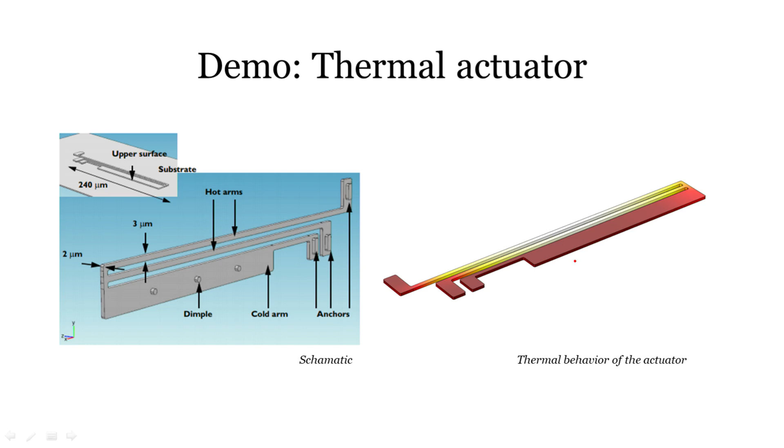within tens of micrometers. So let us see how to actually model this kind of multi-physics coupling, because there are 3 physics that are going to get into the picture. The first physics is the input current that we give. Because of the input current or voltage, there would be a certain rise in temperature because of Joule losses, and because of the Joule losses there is going to be some kind of thermal expansion, because each material has its own thermal expansion coefficient.

This is what we are going to couple. We are going to couple the electrical physics with the thermal physics and the structural physics, which leads to deformation. Our end goal is to see if we change the voltage, how much is the maximum displacement the thermal actuator gives. So let us go and try to understand the physics step by step.

The first physics is the electrical physics. So in the circuit that you can see over here, we actually are going to apply a particular voltage at one of the edges over here, that is one of the anchors, and we are going to put the ground somewhere over here. The voltage that we give could actually be coming through a very big circuit.

If you are a little bit experienced, you can go ahead and make a blank model, so you don't need to add any physics. Just one click will lead you to a completely new, blank model.

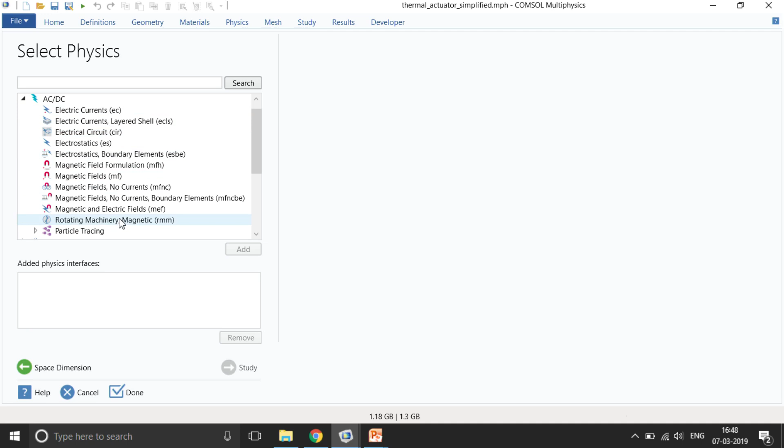So our first step is to do only the electrical physics. Let us go into the AC/DC module. This is the AC/DC part, and in this part there are a lot of different interfaces: electrical current interface, magnetic field interface, rotating machinery magnetic interface where you can model motors. As of now, we will go ahead with only the electrical currents.

This specific interface is to model currents through conductors. If you are talking about capacitors, then you need electrostatics. So let us go with electric currents and add.

So I can go to the next part, which is the study. Here there are many different kinds of studies we can perform. We can do frequency domain study, which allows us to do harmonic input. We have stationary study, where we can give a steady state analysis, that is we give only a particular voltage. Then we have time dependent study, which helps give transient analysis of your complete system. So all these three different kinds of study can be performed.

Along with this, we have small signal analysis, wherein we give a particular DC bias along with the AC component. So let us go with a stationary analysis and click on done.

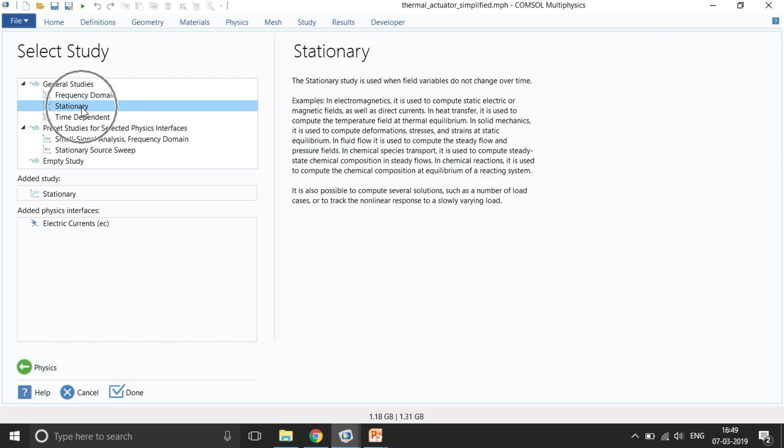The approach that you can follow in COMSOL is the top to bottom approach. That is, you first create the geometry, add the material, add the physics, then perform the meshing, then you do which kind of analysis you want to perform, and finally the results. So this is a top to bottom approach that usually is preferred in COMSOL.

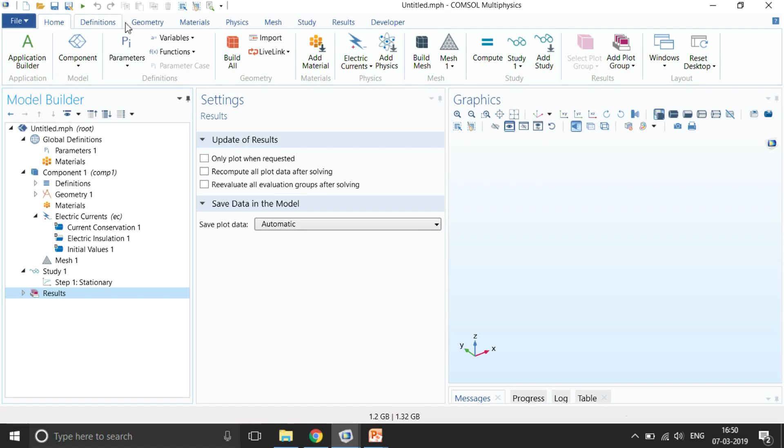One more approach which is preferred is in the ribbon pane that you can see in the top. Here you can see the same thing that you have already seen in the model builder. You have to first create the geometry, add the materials, apply the physics, perform the meshing, analyze the which kind of analysis you want to perform, then finally the results, that is to analyze your results. We also have one more block as developer, that is if you want to write your own code along with the code that is being solved by COMSOL.

So the first thing is to make the geometry. However, to save time, I am going to import the geometry. There are two ways to import the geometry. One is to import through some other CAD tool, and if you want to insert a sequence, it's like a step by step process to make the geometry.

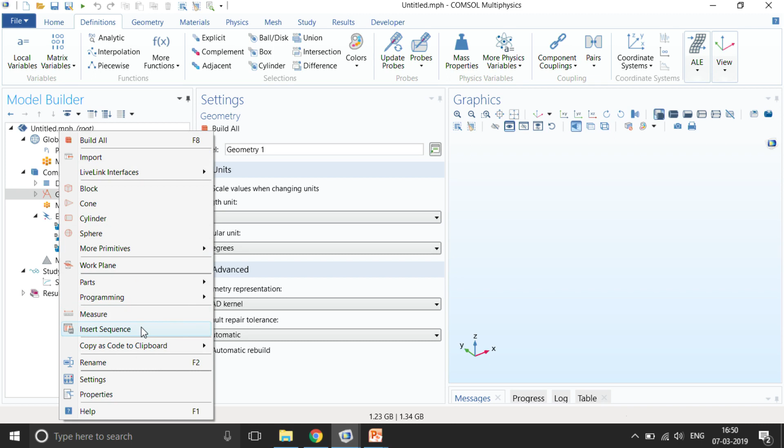If you want to insert that sequence from a pre-built COMSOL file, you can use insert sequence. So let me choose insert sequence, and I choose the model that I have already created, and I click on zoom extents. So this is the geometry that's already available in the library file.

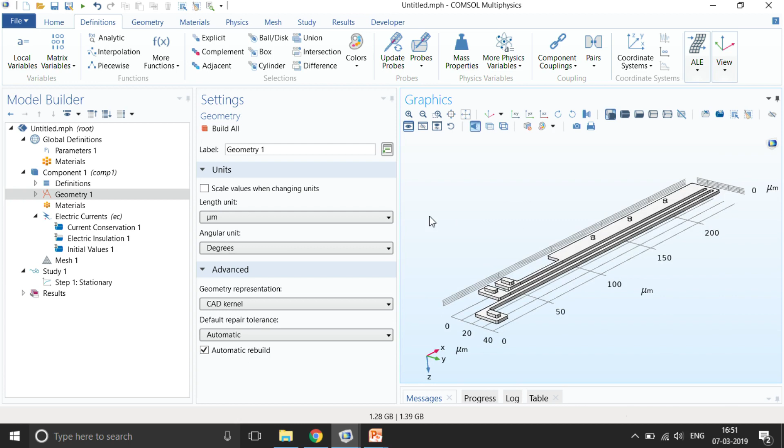So if you want to go through this example model, which is also known as thermal actuator, you can go to file, application library, and just search for thermal actuator, and you will see the thermal actuator model file available over here. So I have added the geometric sequence, as you can see over here.

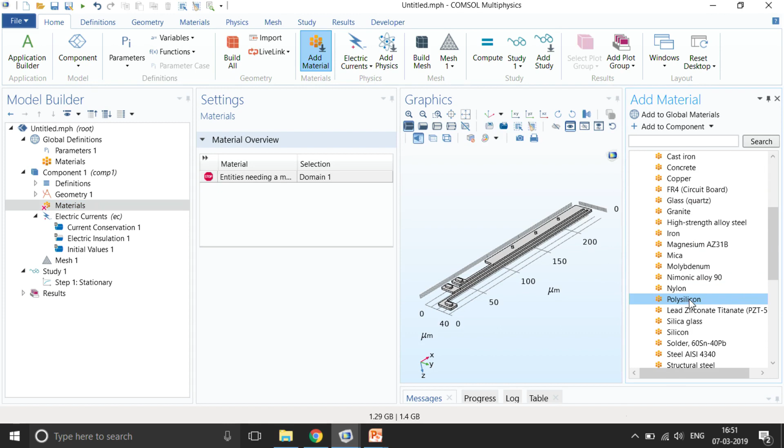The next thing is to add the materials. So let me just add the material by right clicking the material, add material from library. I can go ahead in the built-in, I can have the polysilicon material property. Now we can see that over here the material property includes electric conductivity, which is being defined as sigma as a function of T.

This T is the temperature. What it means is that sigma is not constant, it is a function of temperature. If you want to see what is the relationship, you can open this polysilicon and then go into the analytical function which defines the conductivity, and if you plot, you can see how the conductivity is decreasing with the increase in temperature.

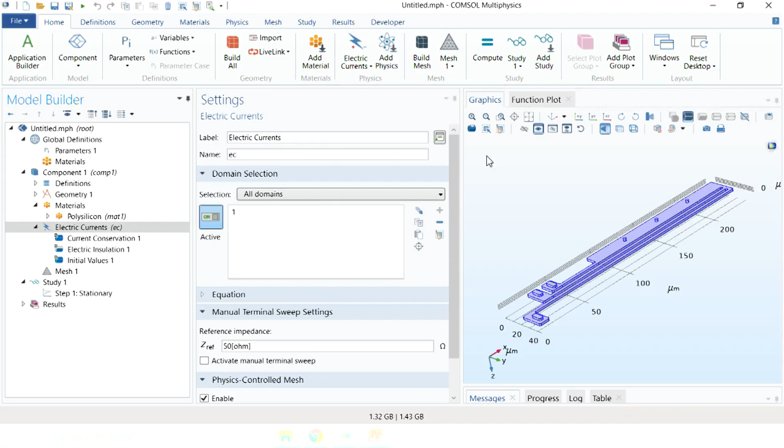The next thing is to give the physics boundary condition. As you can see over here, we apply a particular voltage at this anchor and ground at this particular boundary. There are different ways of applying the boundary. For example, you can use electric potential. Another way is to use terminal if you want to evaluate the resistance offered by your system.

For example, I want to know the resistance offered by a system. So I will go ahead with the terminal and apply that particular boundary over here, and I give the terminal type as voltage, and I choose the voltage as V naught.

Right now you can see that it is showing unknown variable, because we have given a variable name, but you have not defined it in the parameters. So let me go to the parameters. All these parameters have already been assigned, because we have imported a sequence of geometry steps, so these parameters are defining the geometry steps. Let me now define V naught, which is around 5 volts, that is the operating voltage.

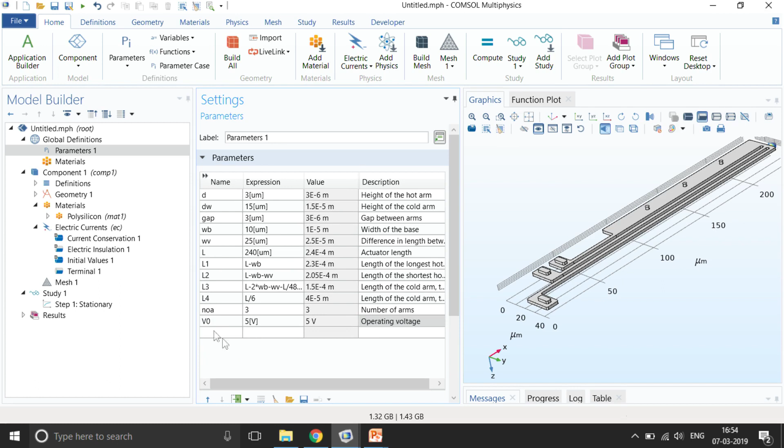So now the error has ceased to exist. There is no error. We have given a voltage over here. So let me also give a ground boundary condition on this particular part over here.

Okay. Let me go to the mesh and click on build all mesh. So, this mesh that you can see over here is fine enough. If you want to improve the mesh, you can directly go to fine or finer. I think fine should be good enough.

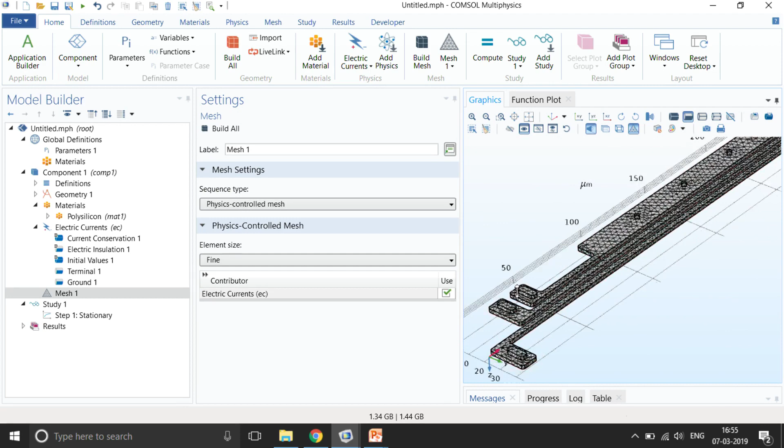No, now you can see that actually the dimple was cylindrical, but over here it is not even a cylinder, right. So, this mesh might not be sufficient enough, because your geometry might have the cylinder, but the physics is going to be solved the way the mesh behaves or looks like. So, we need to go ahead and also increase the meshing.

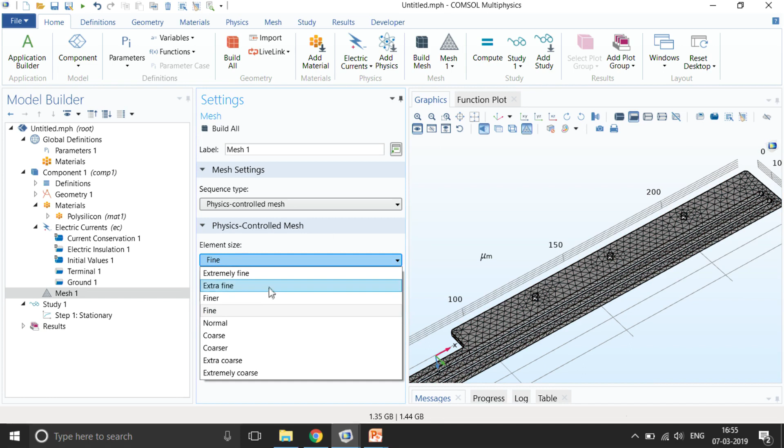Let me go to finer, and now you can see that the mesh has nicely resolved the cylinder, right. So, now this is what looks good to proceed further. So, let me go to my study 1. Let me write electrical study. So, my study 1 is electrical study, where I am only performing the electrical analysis. Let me go to compute and click on compute.

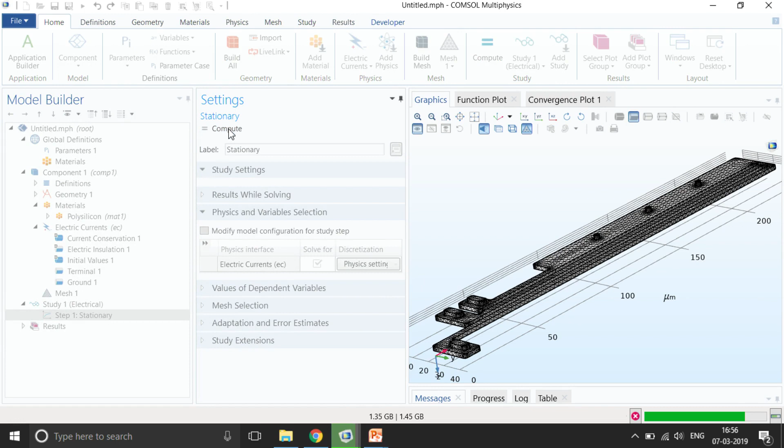So, now you can see the voltage distribution or the potential distribution along the polysilicon. Now, if you want to see the current distribution, the current profile, there are many ways to see. The first way is to know how the current is flowing through. One way to do that would be right click on the results, 3D plot group. In the 3D plot group, I can create an arrow volume. In the arrow volume, in the replace expression, I can search for the current density and click on plot.

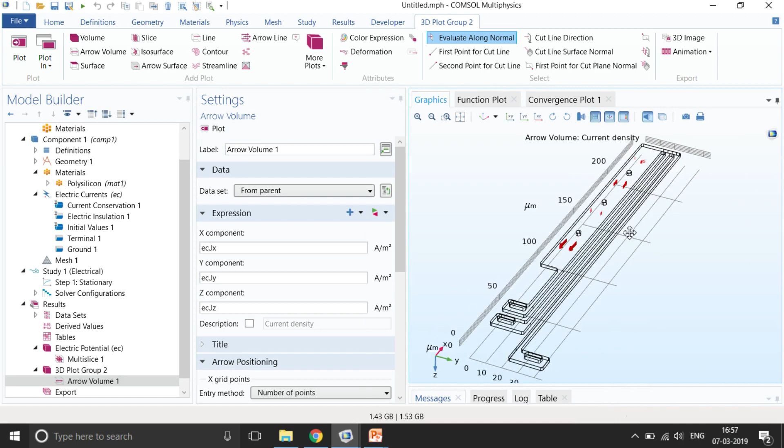Still now I am not able to visualize the current properly. Ideally, the voltage shows that it is very high over here and it is decreasing like this, right. So, our current profile should also be similar to the gradient of your potential. The better way to recognize it would be to change the grid points. So, let me just go ahead and change the grid points. Hopefully, we will be able to see those. So, in x and y, I need to increase the grid points, and in the z point, let me use only 1.

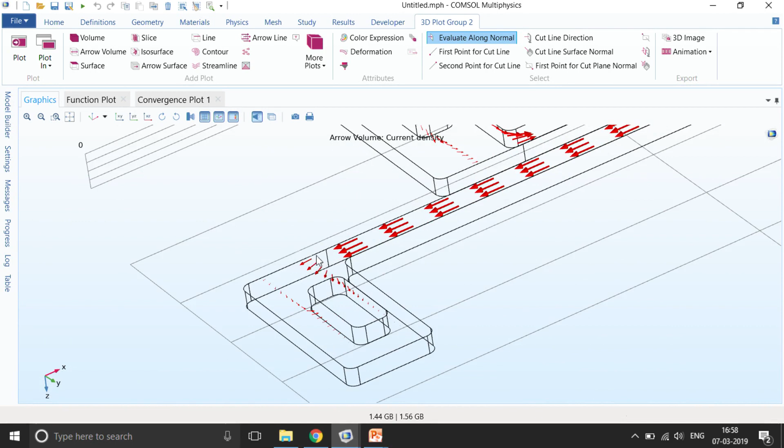And now you indeed are able to see the current flow. So, now you can see that the potential which was applied very high over here is actually making sense, because the current is actually flowing like this, and it is going to turn over here, and then it is going to move back towards the minus x direction to the ground where you have given. So, this actually makes sense, the results make sense.

So, it is always good that once you actually get the results, you also validate the current profile, how much voltage are you getting, to revalidate that whatever input you are giving is actually being conceived by your system.

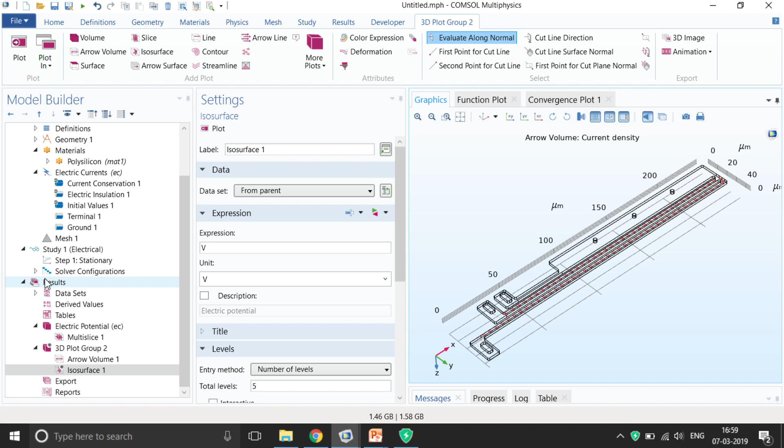Okay, so the next thing is to understand there is a current flow, and we need to understand where the current flow is going to be very high. To understand that, I will create one 3D plot group, and I can create one multi-slice plot. Multi-slice plot would be somewhere in the more plots over here, and I can search for norm of current density. So I can just search for current density, and over here,

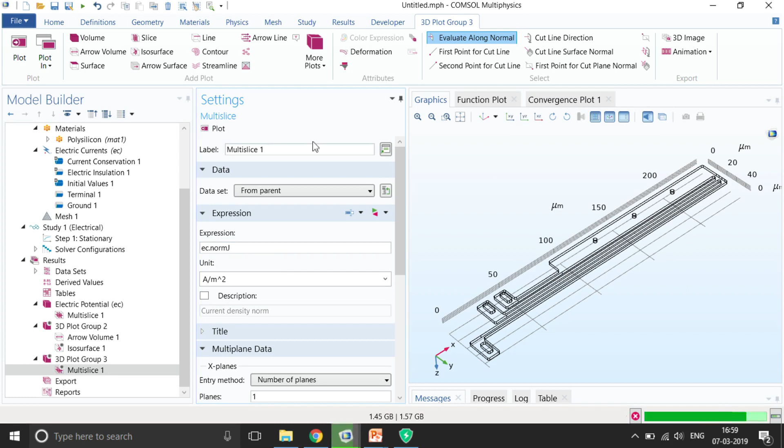and now you can see that the current density is very high somewhere over here, that is in the thin leg over here and over here. This means that the current density at these particular legs is very high as compared to the other domains. So that also means that the losses, which are proportional to the current, are also going to be higher at these particular legs.

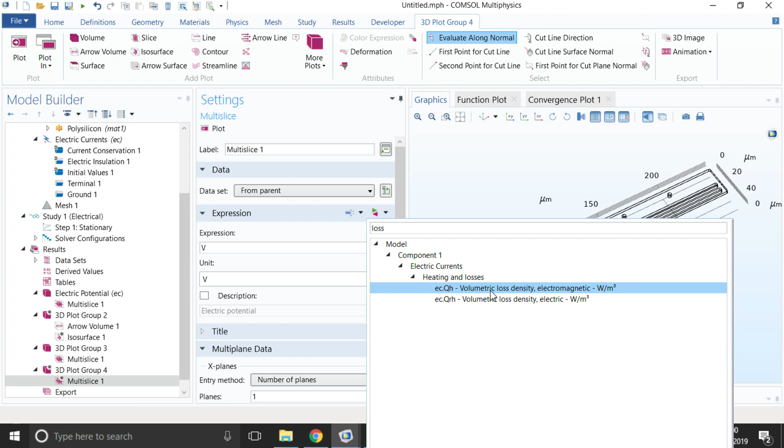So let us also see now if there are losses because of the Joule losses, how I can evaluate this. One way to see it would be again the multi-slice plot. So I can create a 3D plot group by right clicking on the results, and I can create one more multi-slice plot, and I search for losses. I have volumetric loss density, that is complete electromagnetic, and then only the electric part. There is no magnetic component, so we can choose any one of them.

Let me choose QH and click on plot, and indeed that's what it is showing me. The losses are very high at both of the legs. You can see over here, thin legs. It is even high at the corners, and that's the same thing the current density was showing, that wherever the current density is high, at the same place the losses are going to be very high. So these losses are, as you can see, in order of watt per meter cube.

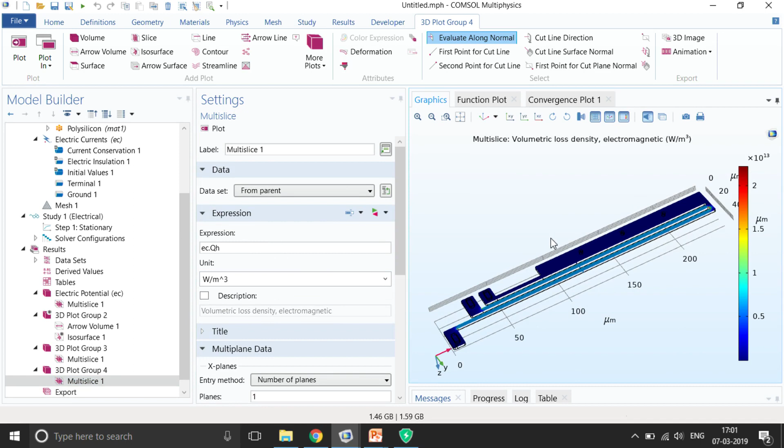Now you still have the losses, but you don't know what change in temperature the losses are going to lead to. You don't know which ambient temperature this system is working with, because we have not assigned it yet. So let us also set up a thermal condition to see how the temperature rises if we give a voltage of 5 volts at room temperature.

Before that, because we have many studies that we are going to have, to reduce the complexity, I will group my results. So I select all of them, right click on the selected nodes, and click on group. So my group 1 is electrical analysis.

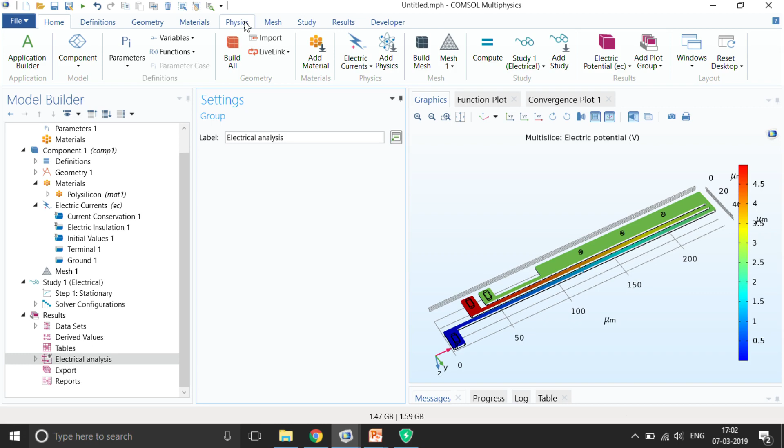The next part is I am going to add the thermal physics. So I go to physics, add physics, and I add heat transfer in solids. Now you can see that once I go back to my polysilicon, earlier only the electric conductivity and the permittivity had a green tick mark, but now as we have added the thermal physics, the heat capacity at constant pressure, the density as well as the thermal conductivity have been activated. Again you can see that the thermal conductivity is a function of temperature.

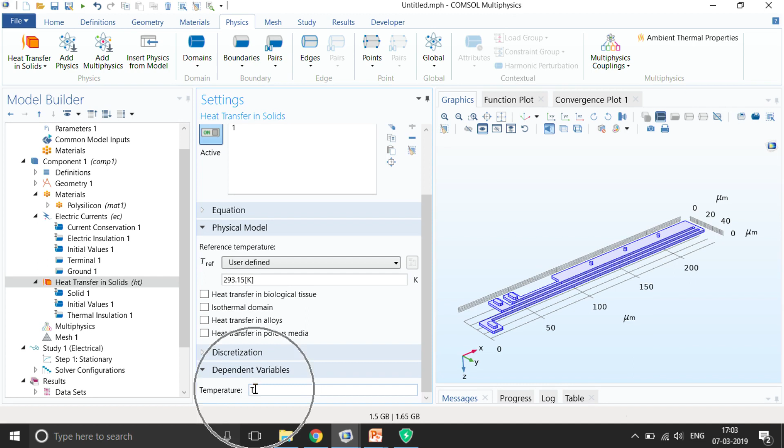The capital T is actually coming from here once we do the coupling. Even for the electric conductivity as a function of T, the capital T would be coming from the heat transfer in solids.

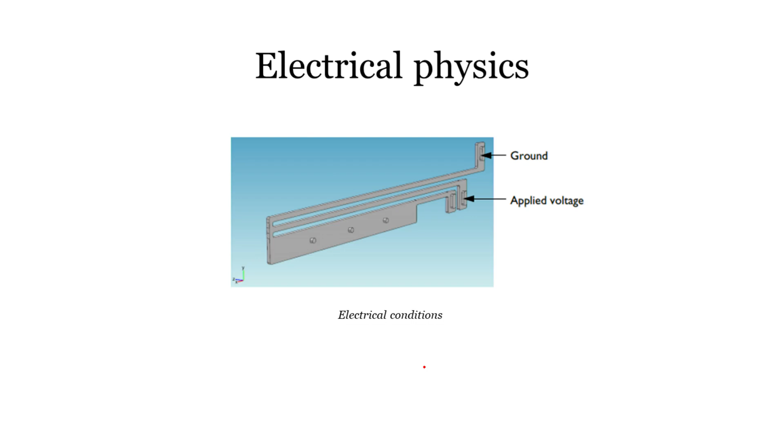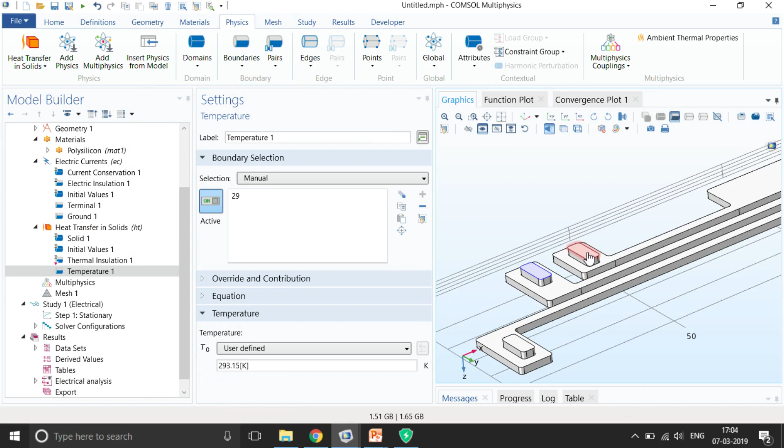So let me go to physics and add the fixed temperature. To add it, I right click on heat transfer in solids, go to temperature, and click on these boundaries, and by default this is the room temperature. As well as the top of the dimple, I click those. So these boundaries are going to be tied to a particular temperature, and it cannot increase from that.

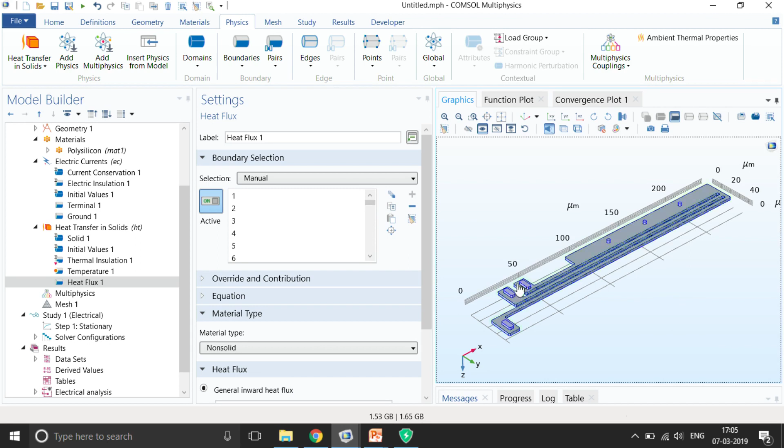Now we are also going to add the convective heat flux. To do that, just right click on heat transfer in solids, and use the heat flux boundary condition. I left click on my graphics and use Control A. That selects all the boundaries, and now I need to deselect the boundaries of the anchors and the dimples.

Next, are we giving an inward heat flux? No. Are we giving convective heat flux? Yes. So I enable this, and I also need to give an external temperature, which is room temperature by default. That looks fine, and the heat transfer coefficient as 5, which means there is not even airflow actually, just air surrounding this particular system.

If there is airflow, the heat transfer coefficient would increase. If there is water cooling the system, it will increase even more. So this heat transfer coefficient depends on the ambient temperature and the cooling condition that you are trying to give. For example, you can also choose external natural convection, internal natural convection, external forced convection, and internal forced convection. These are all the options that are available.

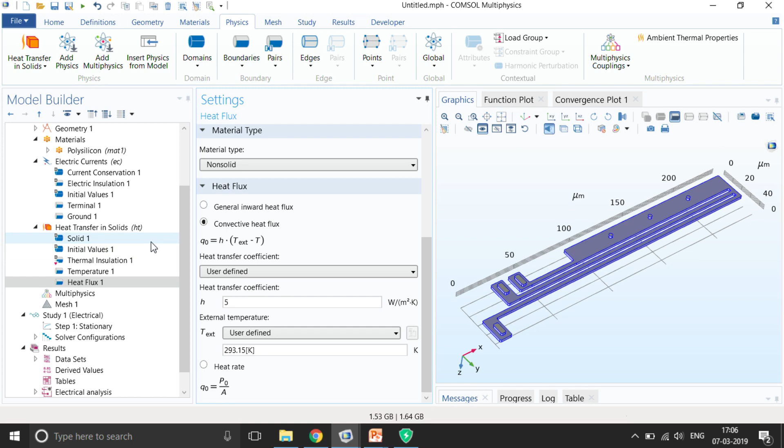So we are done with the thermal physics. If you go back to solid 1, you can see the actual equations being solved here. Similarly, in the current conservation node, you can see the actual equations being solved by the electrical physics.

Now coming to the coupling part, how the electrical physics and the heat transfer physics are getting coupled. If you were careful enough, you would have seen that this multiphysics node was not there before, but now it has come up because there are two physics that can be coupled. There are many automatic couplings. In addition to that, there are also manual couplings.

So if you want to add the automatic coupling, just right click on the multiphysics node, and you can see over here the electromagnetic heating. So let's click on the electromagnetic heating. This, as you can see, couples your domains and boundaries from the electric currents to your heat transfer in solids interface. So whatever losses were accumulated by the current that is going to flow, all the Joule losses, are going to get transferred into the heat transfer in solids part, and that would be responsible for the rise in temperature. So now let me go to the mesh.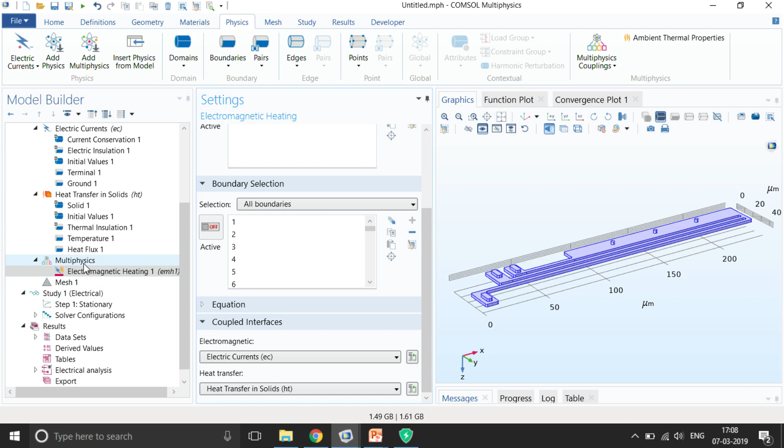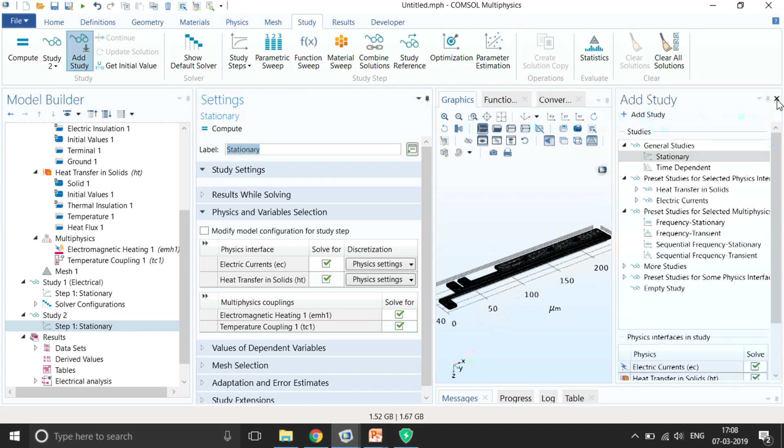Okay, I need to add one more multiphysics coupling, that is temperature coupling. And let me go to the mesh. There is no change in the mesh anyway, so we can now go ahead and add one more study. So I add one more stationary study. Over here I write electrical and thermal analysis, because we are going to do both now, and you can see that both have been activated over here with the multiphysics node.

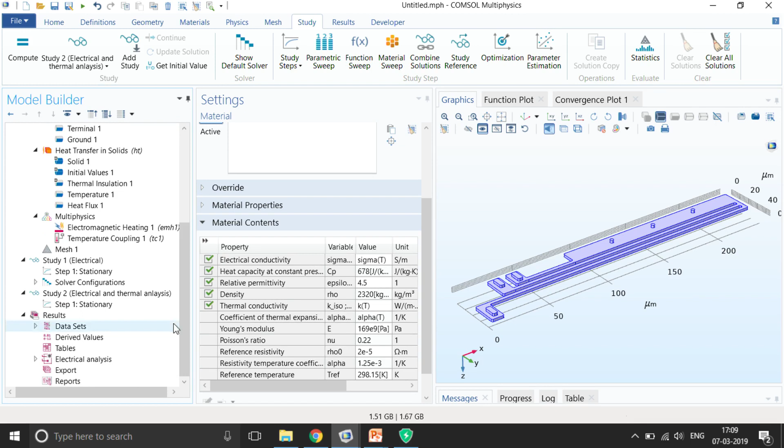It is very important to note that your results would be accurate enough only if you match your material properties as much as possible to the real properties. If they deviate from your actual experimental material properties, then the results will also deviate. So it's very important to come back and check the materials that you are using, because this is very important. Okay, so let me go to my study 2 and click on compute.

You can also see the convergence plot with the error. You can also manually tweak the amount of error, that is the relative tolerance, that you want to use to make the system converge. So now you can see the first plot is electric potential, the second plot is the temperature, and as we have seen before, the temperature rise would be somewhere over here, right? Because if you see the electrical analysis in the power losses plot, this is the power loss plot over here. There are a lot of heat losses over here.

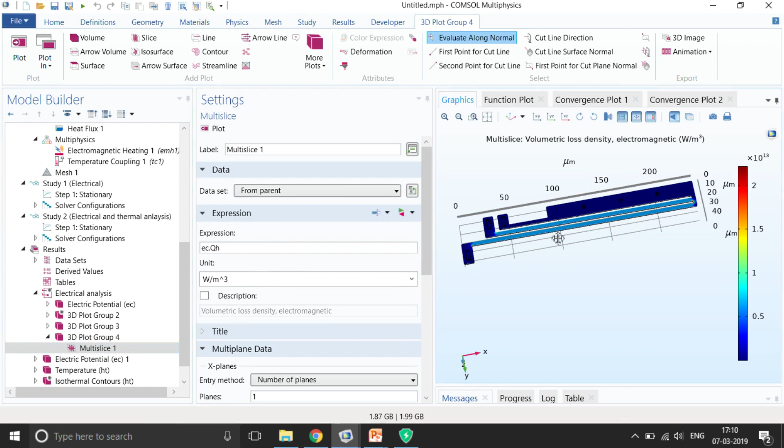So this is the temperature plot. Now, for example, if you want to see the maximum and minimum values, you can see them over here. If you want to see the actual values without the exponential part, you can come to the number format and increase the precision. So you can see that it's a very high temperature.

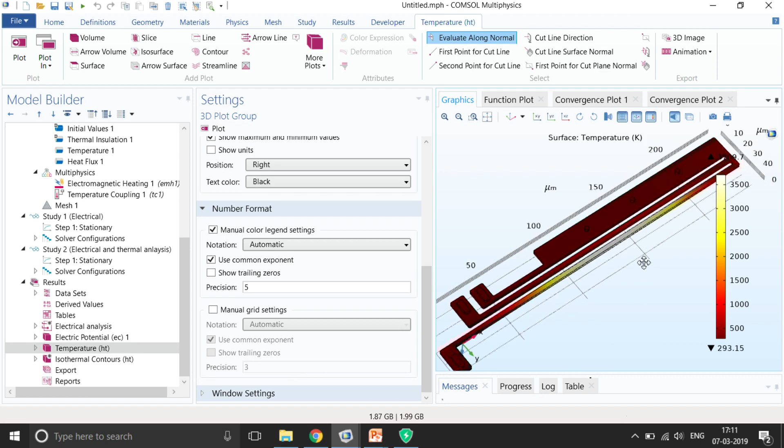And it's also important to note that COMSOL is a tool which will give you the results, but it will not tell you whether it is going to melt or not. This is the part that we have to do ourselves. For example, if the melting point of our system is around 2000 Kelvin, COMSOL will not tell you that the temperature has risen beyond 2000 and give an error. It will tell you that the temperature is still increasing, but you have to understand yourself that it's gone beyond the melting point, and this is how it actually stops.

Now, for example, you know the temperature and you want to see the temperature plot from this point to this point along a line segment. How is the spatial distribution? To do that, I can create a 1D plot group. So I right click on the results, create a 1D plot group, and then right click on the 1D plot group and create a line graph. In this line graph I select which line I want to use. So let me use this line, and I want to evaluate my temperature.

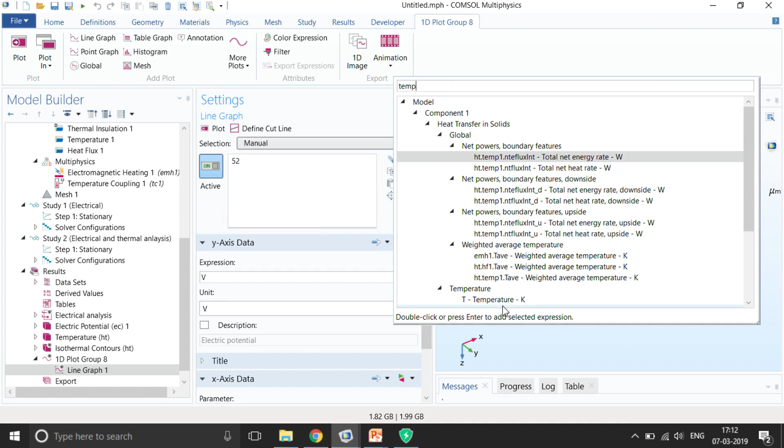One way is to directly enter the expression over here. An alternate way is to click on replace expression and search for temperature. Before that, we have to be sure that we are using the dataset of study 2. So let me choose my dataset as study 2, that is electrical and thermal analysis, and then search for temperature. You can see the temperature variable has appeared over here. So I double click on that, choose whether I want it in Kelvin or degrees Celsius, and click on plot. So now you can see the spatial variation of temperature along this particular line.

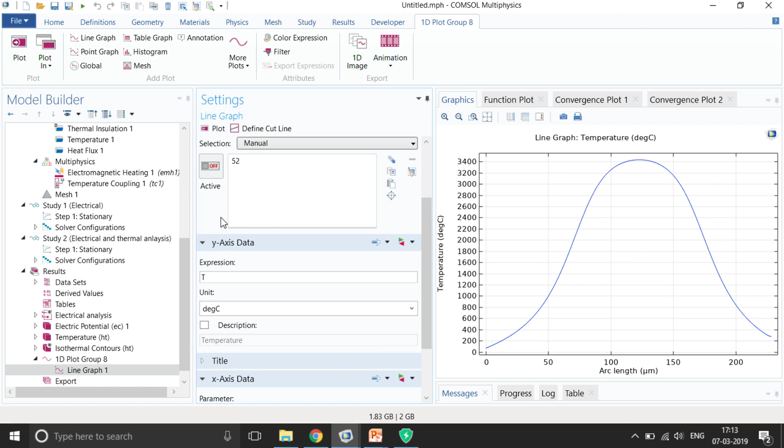Okay. The next thing is to perform the structural analysis.

Before doing the structural analysis, what I will do is again group my electrical and thermal analysis together, and I can write over here electrical and thermal analysis. The next part is to perform electrical, thermal and structural analysis. So let me go to my presentation and see how are the structural conditions.

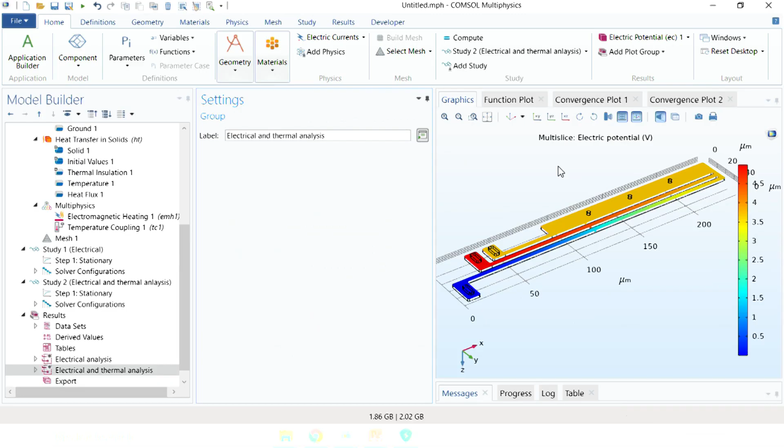So let us go to COMSOL and add this physics. We have already added the electrical physics and the heat transfer physics. The next thing, I go to the physics, add physics, and I add the heat transfer in solids. I just double click on this, and over here, oh sorry, I added the wrong physics. I need to add the structural mechanics. So I go to the physics, add physics, structural mechanics, and I add solid mechanics physics.

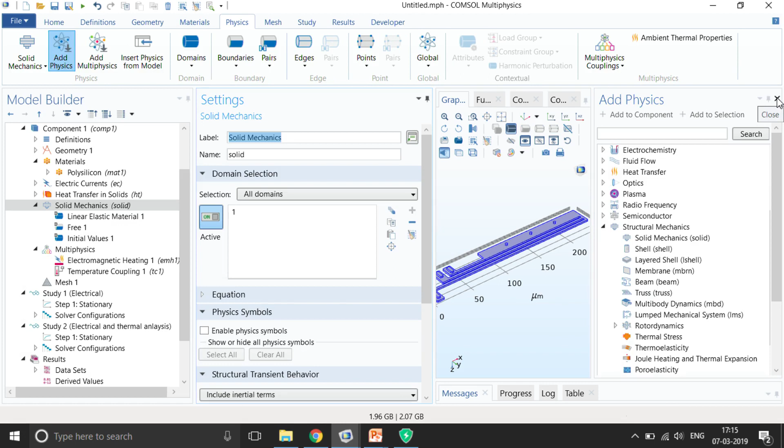Again we can go to the material section, and you can see now the Young's modulus has been enabled over here, the Poisson's ratio has been enabled over here. Both are a scalar value. If you want, you can also make it a temperature dependent material property by just writing over here, for example, 300 divided by T. Okay, so this is just for example. Let us go with a constant value.

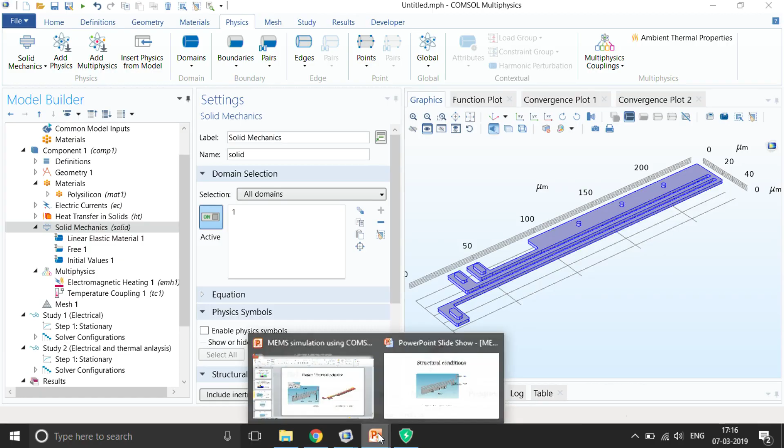In my solid mechanics, as you have seen, we are going to give roller boundary condition at the dimples and fixed boundary condition at the anchors. So let me right click on solid mechanics and I give a roller boundary condition. You can see the equation. All the boundary conditions and domain conditions give the equations, so from the equation you can understand how the motion is going to be. It means the normal motion of your boundary is 0, while it will allow the tangential motion.

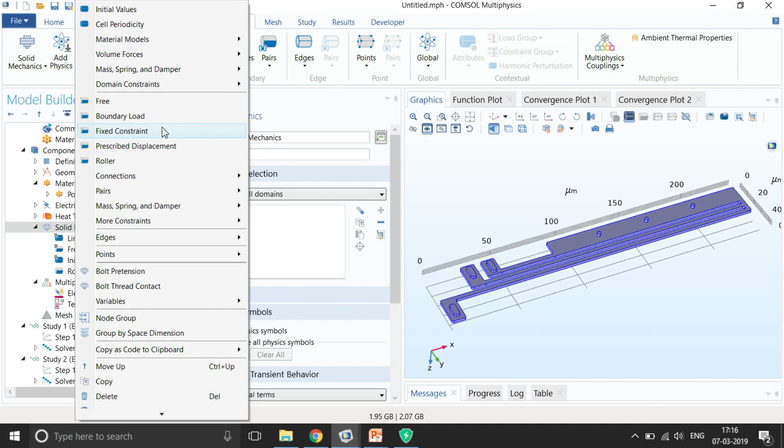Now we go ahead with the fixed constraint. Again right click on the solid mechanics, add the fixed constraint and choose this boundary. You can see the equation that u is equal to 0. So tangential, normal or any angular displacement are not allowed.

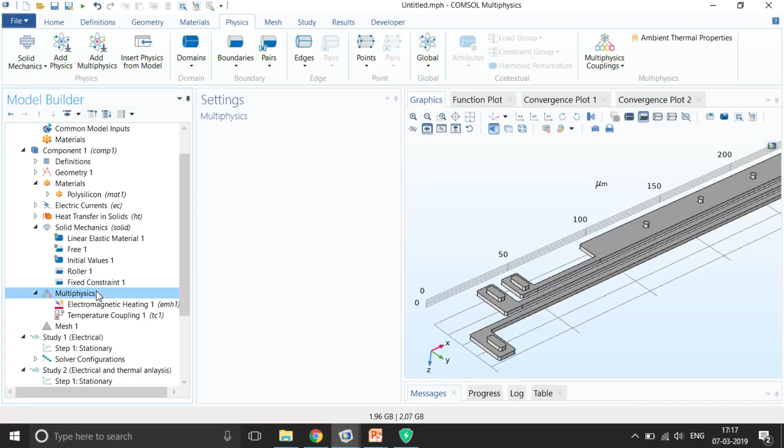The next thing is again to use the coupling. We have already established the coupling from electric currents to the heat transfer, that is the Joule losses leading to the rise in temperature. Now we need to couple the rise in temperature to the structural mechanics using the thermal expansion. The way to add that would be right click on the multiphysics and then click on the thermal expansion. The other multiphysics nodes would not be of interest to you as of now.

And then I add my domain. Once I add this, you will see that the thermal expansion coefficient has been added. That is also a function of T. So you can go within it. You can see alpha over here, how it is a function of T. So we have added the thermal expansion.

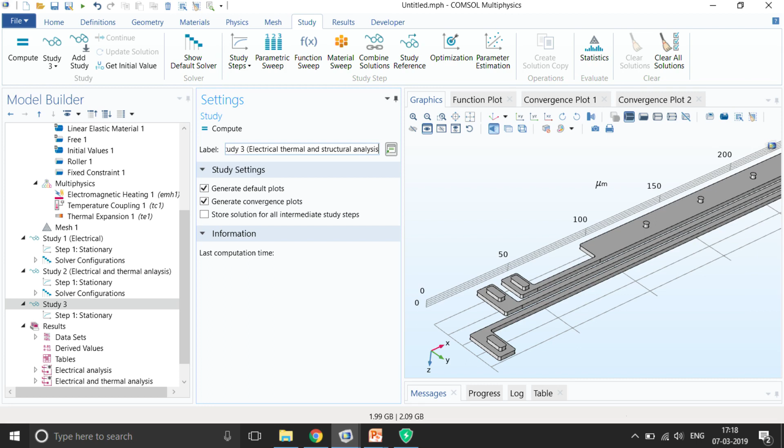So we go to the study node and add one more study, a stationary study. In my stationary study 3, I write electrical, thermal and structural analysis. And over here you can see that I have enabled all the 3 physics along with the 3 multiphysics nodes.

You can see over here the rest of the boundaries are free. By default all the boundaries are free, but if you run your stationary analysis, that is steady state analysis, with only free boundary conditions, your problem becomes ill posed and you will get non convergence issues. So it's always good to assign some fixed constraint boundary conditions. So let me go to my study 3 and click on compute.

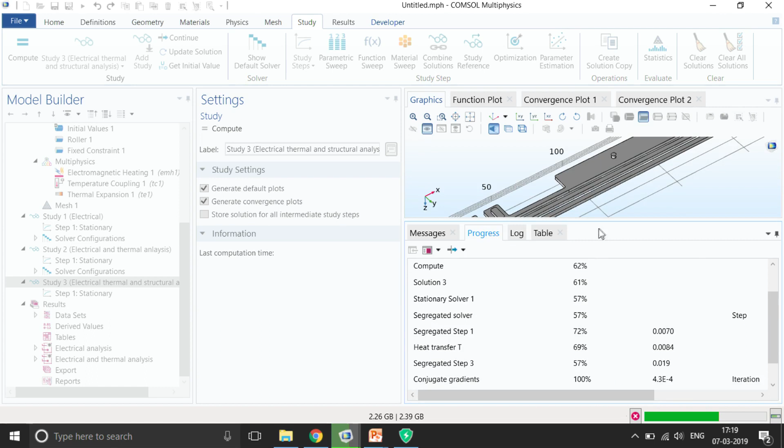In the progress bar you can see what solvers it is using and how many iterations. We are not going to cover in detail the solver configurations. You can see the convergence plot over here.

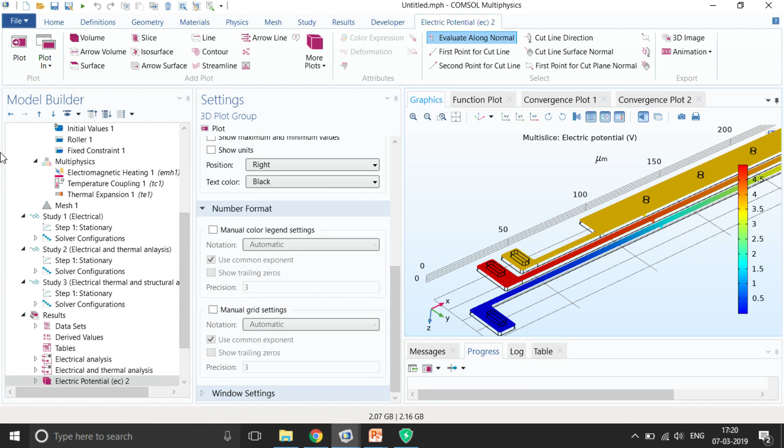You can see the results now. You have already seen the temperature variation, isothermal contours, and the stress plot. Now you can see the stresses developed with the surface plot. If you want to see it in Newton per mm square, click here and search for Newton per mm square or MPa, or directly mention Newton per mm square. Click on plot to see the stresses, and you can enable the maximum and minimum values to see what those values are.

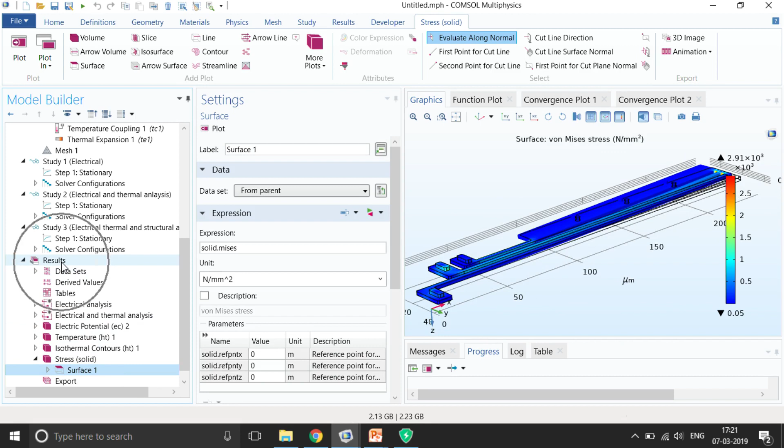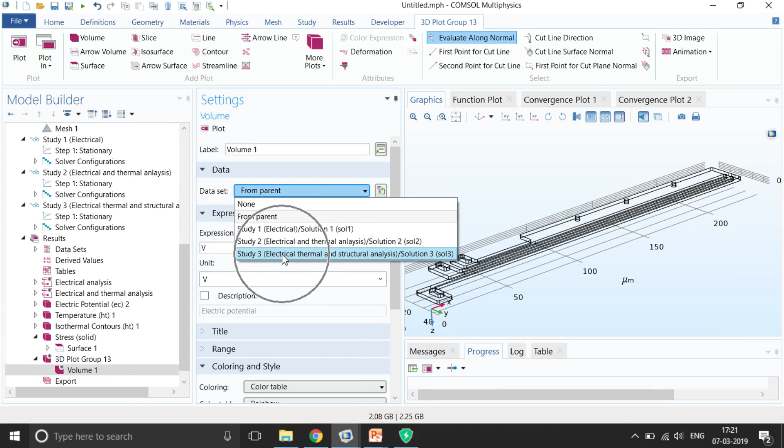If you want to see the displacement, right click on results, 3D plot group, create the volume, and search for displacement. We have to see the data set we are studying, which is electrical, thermal, structural analysis. Let me choose this and search for displacement. You can see this variable, solid.disp, total displacement. Let me choose this, and you can see it shows a maximum displacement of around 21.2 micrometers somewhere over here.

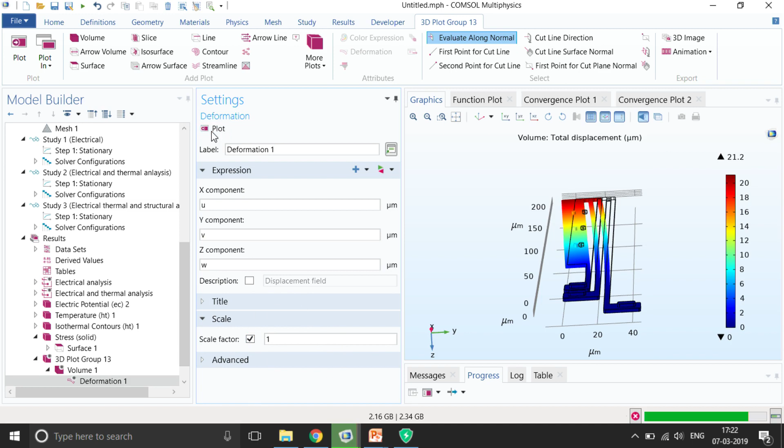Now if you want to visualize how much deformation occurs based upon the voltage given, I can right click on volume 1 and click on deformation. I can enable the scale factor as 1, so this is how much it's going to displace.

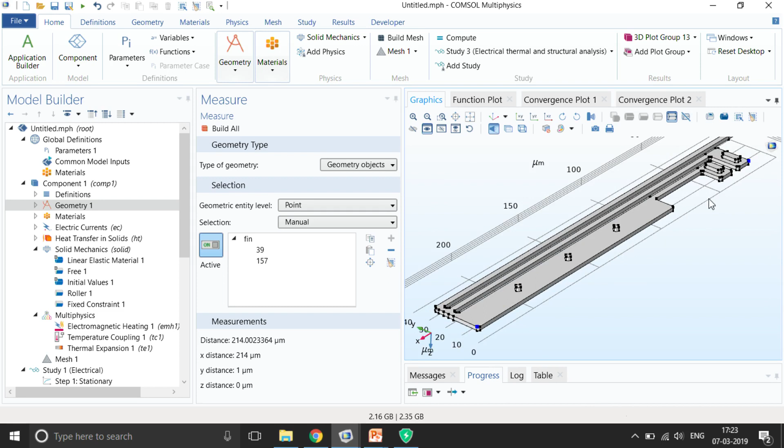If you want to see this length, you can measure by right clicking on the geometry, going to measure, using the geometric entity level as point, and measuring the length from one end to the other end. Let me start from this point and this point. The total length is around 200 micrometers, and that particular device is bending around 21 micrometers along the minus y direction.

Now I want to know how my displacement varies if I change my potential. I also want to see the maximum temperature occurring within my system as I change my voltage, because I know my polysilicon would also have some kind of melting point, so let me go to the internet and search for the melting point of polysilicon.

It is around 1400 degrees Celsius. So now I know I have a threshold value which the maximum temperature should not exceed.

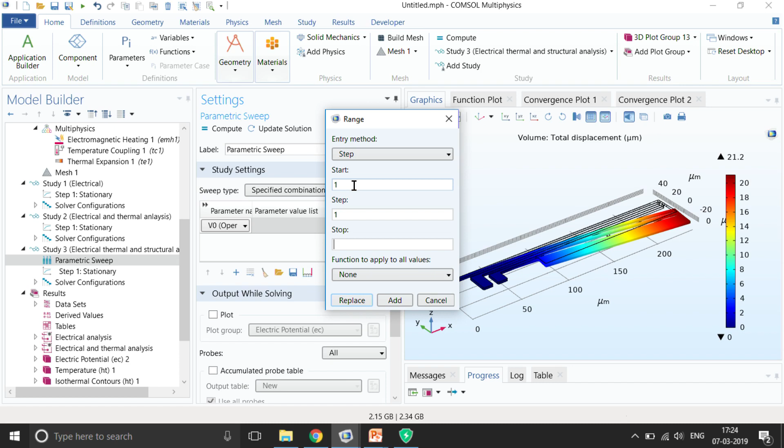Now what I can do is sweep my voltage. To do that, I right click on study 3 and do a parametric sweep, add my voltage V naught, and write the range. I can click on range, start with 1 volt with a step of 1 volt and a stop of 5 volts, so it moves from 1 volt to 5 volts, and then click on compute.

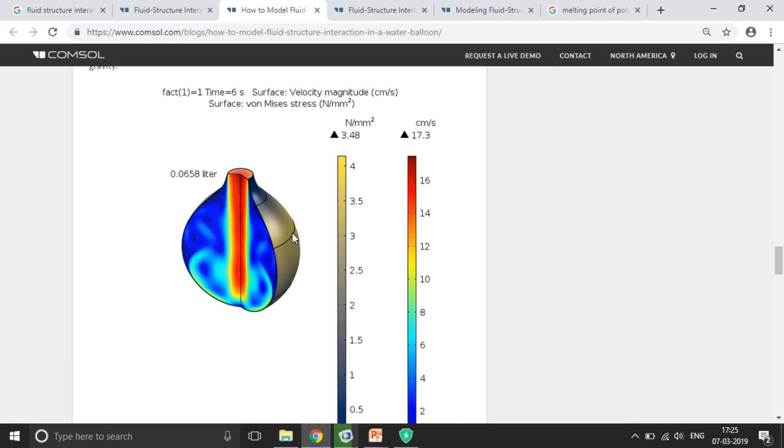While it computes, there were a couple of blogs on fluid structure interaction I'd like to showcase. All the blogs have very nice animations, which help understand the physical intuition of the physics. For example, this is a water balloon during inflation, showing velocity magnitude, stresses developed, and more. This is the fluid structure interaction problem where the balloon is getting filled.

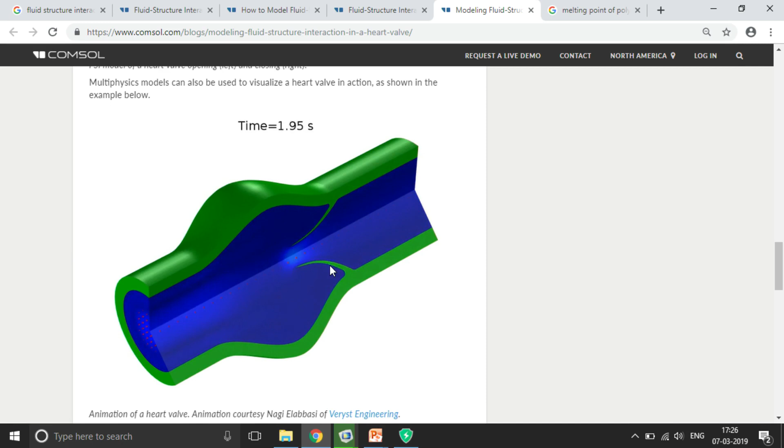We had one more fluid structure interaction blog, this one for a heart valve. You can understand with the change in flow velocities how the valve is actually moving. This requires a moving mesh technique, so such fluid structure interaction modeling could also be performed.

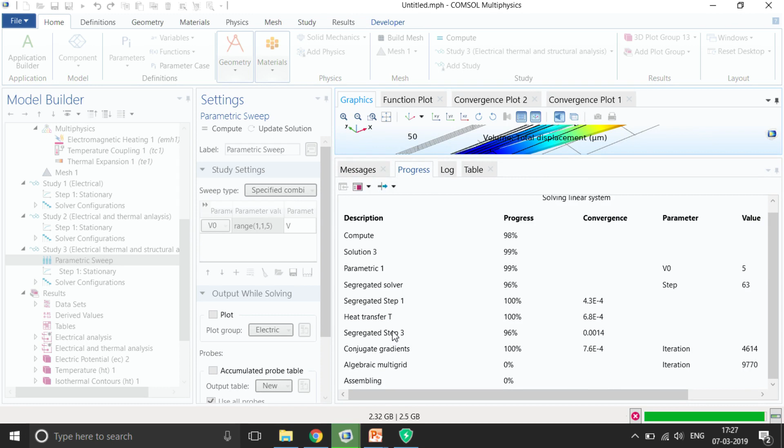Here you can see what kind of solvers we are using, a segregated solver. There are fully coupled solvers and segregated solvers, the two basic kinds. A fully coupled solver takes all the physics together, while a segregated solver takes it step by step. There are also two types of solvers for stationary problems: direct and iterative. Direct is more robust and takes less time, but more memory. The iterative solver takes longer but uses less memory.

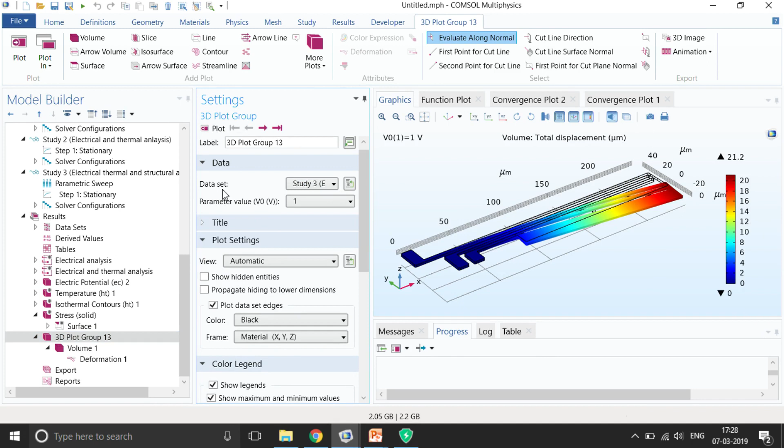So we have received some results. Now you can see that we have 5 potentials. In the 3D plot group I can see for 1 volt we are getting a displacement of 21.2.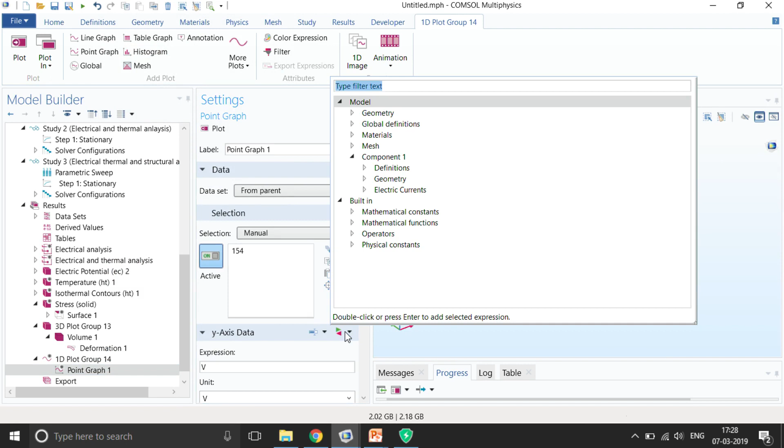I can create a point graph, and I choose this point. Once I select the data set, the appropriate data set that is study 3, I can ask it to plot the displacement. I search for displacement, double click on this, and click on plot.

It would be automatic, the x axis would be the parameter voltage and y axis is the displacement. You can see that as the voltage increases, the displacement also increases, and it's a non-linear curve as we expected. You can also enable the markers, using asterisk marks at the data points, so at whatever points you swept you get the results.

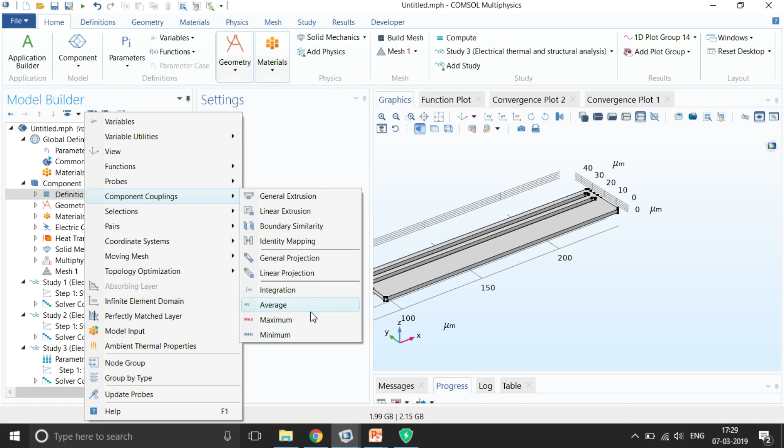Now, the next point is to see the temperature, specifically the maximum temperature. To do that, I right click on definitions, create a component coupling, and choose maximum. I select the domain, and to make this operator max op1 available in post processing, I need to right click on study 3 and click update solution.

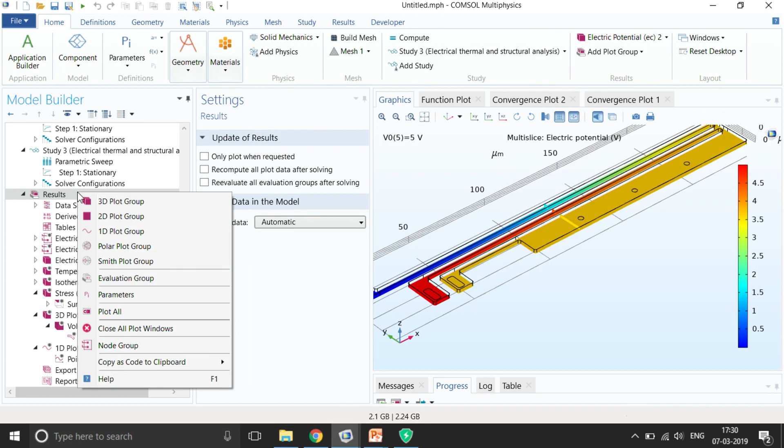That is it. Now I need to create a 1D plot group again. I right click on results, create 1D plot group, then within it I right click and create a global plot. Here I use the same operator max op1 as a function of temperature, and I use the data set as my third data set, choosing all of them.

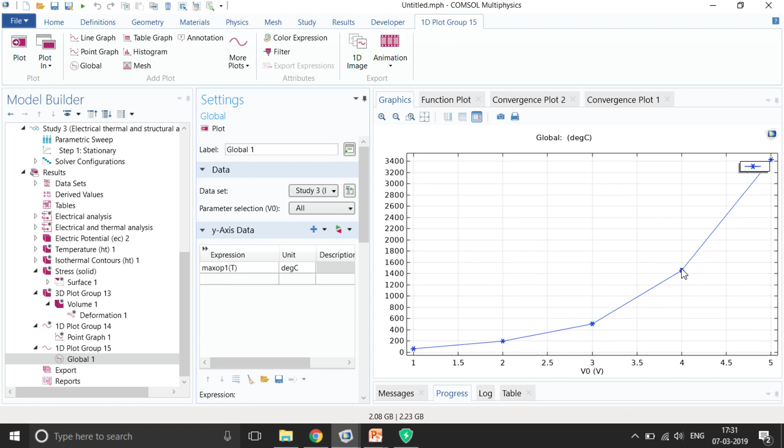My x axis again is voltage, and now you can see the max temperature is increasing as the voltage is increasing, and I can add asterisk marks at the data points. If you assume our melting point is around 1500 degrees Celsius, then your device would only work up to 4 volts. If you go more than 4 volts, your device is going to melt, for example.

This is how you can actually do the analysis. One more thing I wanted to show is, if you want to share this, let me just group this first. Now this is the electrical, thermal and structural analysis.

Now, if you want to share this particular model, you could be a researcher, a student, or a professor taking this course, and you want to share this complete analysis with your colleague. If you are a professor, you would like to give it as an assignment for students to change some parameter and get different results at different operating ranges. Or you could be an R&D person specializing in electrical, thermal and structural analysis who wants to give this model to design engineers.

They don't actually need to go through the complete model, they are only interested in the results. They can vary the input parameters and finally get the results, without needing to see what is happening inside. Or you could be a student giving a thesis presentation, and the professors attending are interested to see different operating voltages or conditions, and at that time impromptu they want to change it.

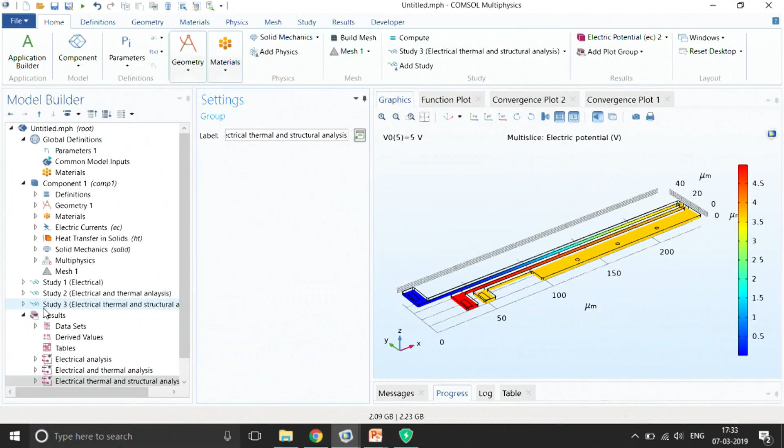It's very simple to create an app. That's how we will show it. To do the app, it's important to parameterize. So I can go to my range and write start_v, step_v, and stop_v. These three parameters I have defined.

That is my start voltage, my step voltage, and my stop voltage. I will click on replace. Again, it's saying unknown model parameter because I have not defined it yet. So let me write start_v as 1 volt. It's always good to write your parameter along with the unit, so that there are no inconclusive results.

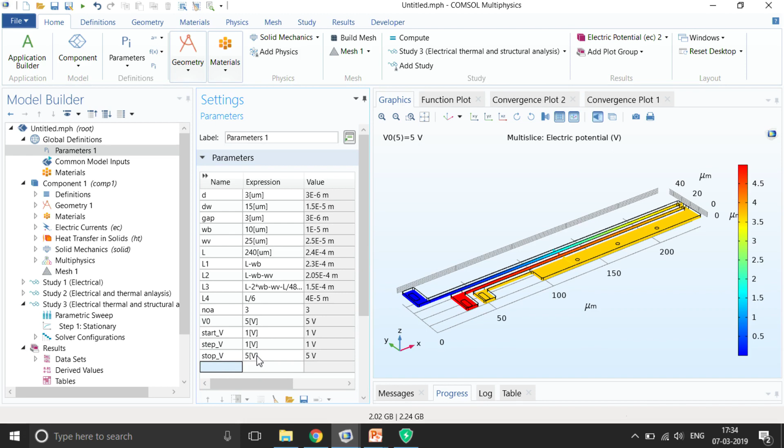Step voltage is 1 volt, and the stop voltage is 5 volt. So it starts with 1, has a step of 1, and stops at 5 volts. Again, it's always good to check that there are no spelling mistakes and such things. So I have defined the parameters.

I know what plots I want to see. For example, I want to see my thermal plot, and 1D plot groups 14 and 15. So I go to my application builder with one click, and over here I can just click on new form.

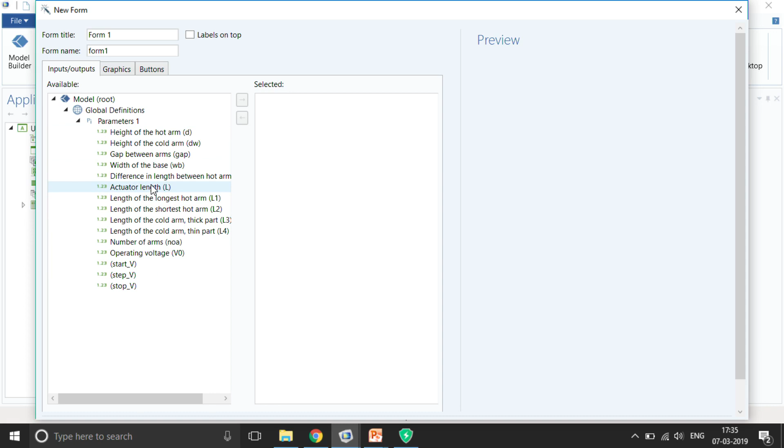Once I click on new form, it asks me all the parameters I want to change. For example, if you want to change the geometry, those parameters can also be given. As of now, we will give the start voltage, step voltage, and stop voltage. The actuator length could also be given, so if you want to vary the length and see how the temperature varies, that's also possible.

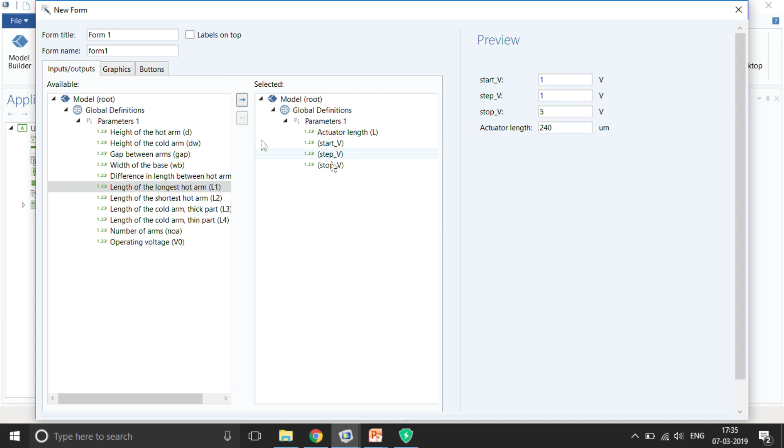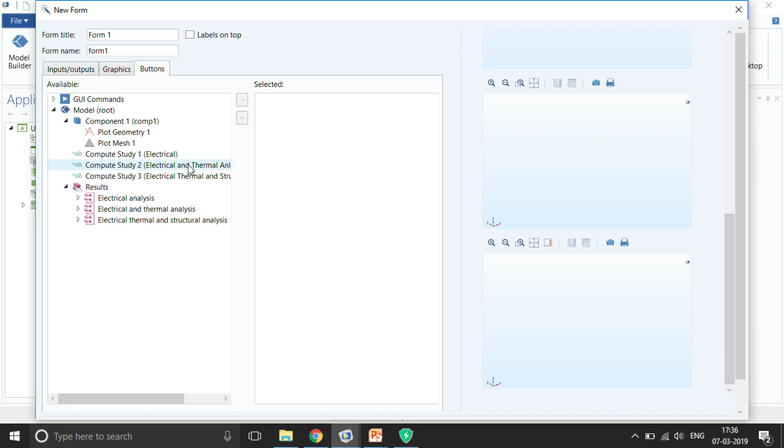Then the next thing is the graphics - what do you want them to see? For example, the temperature, the stresses, or the displacement. You also want them to see how the rise in temperature occurs with the voltage, and the displacement with the voltage. On the right side, you will see the graph or form being built, and then what buttons or kind of analysis they want to perform - only electrical, electrical and thermal, or electrical, thermal and structural.

So as of now, let me give electrical, thermal and structural analysis and click on add selected. And if you want, you can also add all the studies, the first and the second one. Just click OK. So this is my first result over here. I can move and modify all of them, make it a little larger so it's easy to visualize.

Now the compute button was somewhere over here. So I can write and change the text as electro-thermal or thermo-structural study. I can keep it somewhere over here, and move my actuator length somewhere over here. So this is my voltage conditions, this is my geometry conditions, and this is my compute button.

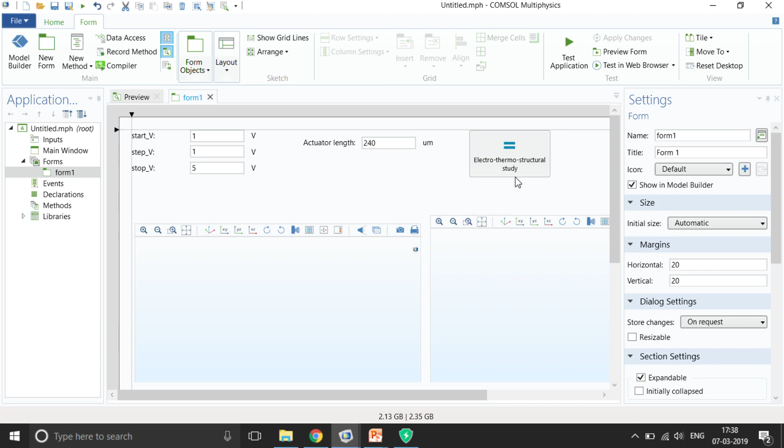So which kind of analysis do I want to do - I click on test application. So this is how your app would look like. Your professor, your student, or your design engineers can go ahead and change the actuator length, for example to 300 micrometers, and then click compute, and the next set of results would come up.

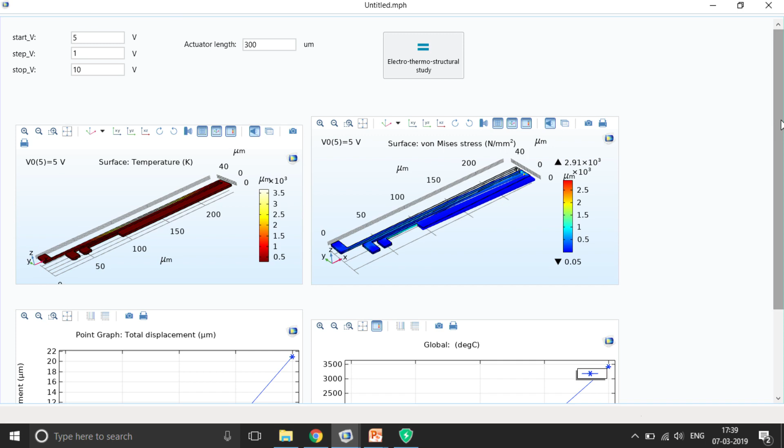They can also change the start voltage, for example to 5, with a step of 1 to a stop of 10, and then compute the study and see the change in results. You can also add parameters as material properties and change the material property over here. This could be shared with your students as a standalone tool, and they can vary all these parameters and gain a lot of understanding of the system by themselves. So this is how the complete simulation of COMSOL is.